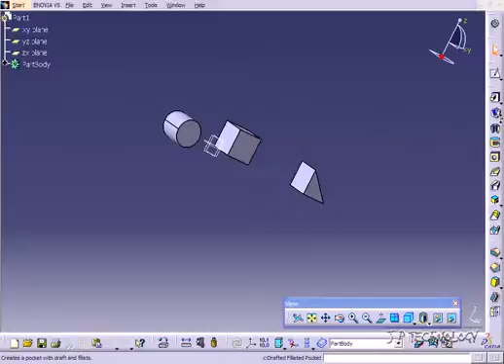This is tutorial number 44, and it covers how to use the multi-pocket feature within CATIA v5. To start off, open up tutorial part number 42, which is located on the DVD. So to find the multi-pocket, it's either on the toolbar here, or you can find it if you go to Insert, Sketch-Based Features, and Multi-Pocket.

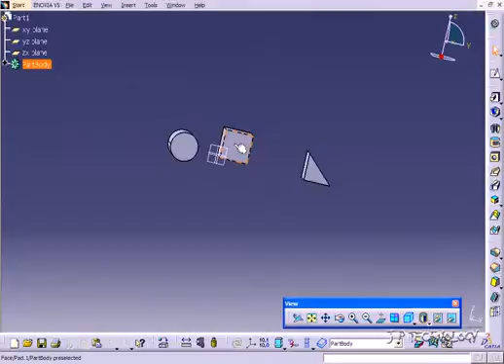So the multi-pocket works just like the multi-pad that we used in the last tutorial. So you're able to create one sketch with multiple closed profiles, and from those closed profiles you're able to use the pocket to cut into an object at different lengths and heights. So to start off, let's click the face of the square right here. Let's click Sketch, and we'll zoom in, and let's draw a bunch of little squares on the face.

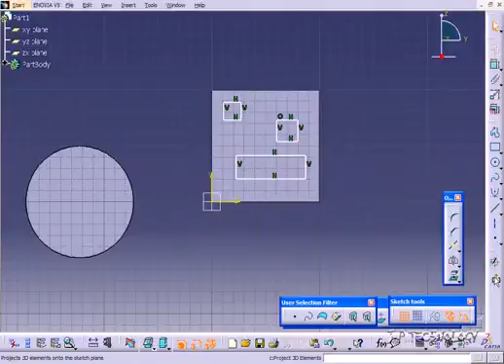Now we've got 3. Now let's check our sketch tools, so our sketch analysis. And just so you know, you've got 3 closed profiles that you're able to either cut or extrude with. So let's close this, and let's go back to our other workbench. And let's use the multi-pocket. And what we're going to do is we're going to cut into this part at different heights. So let's click the first one, and you'll see it highlighted in blue. And let's cut this one all the way through.

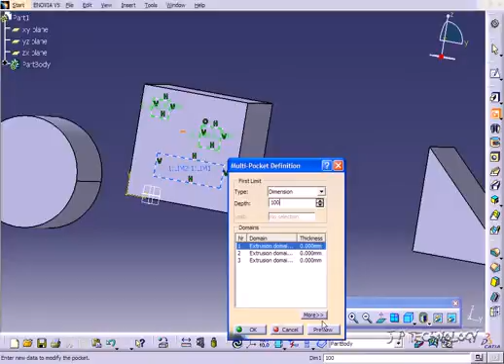So let's type in 100, click preview, and if you rotate it around, you can see that it's gone all the way through. Let's click this one, and let's make it 50. And we'll click this one, and we'll make it 20. Now we'll click OK. And if we look through, you can see that we have 3 different cuts at different lengths from the one original sketch.

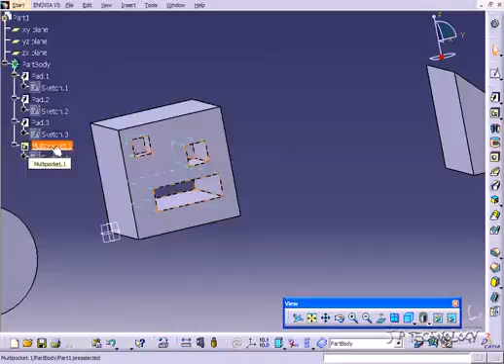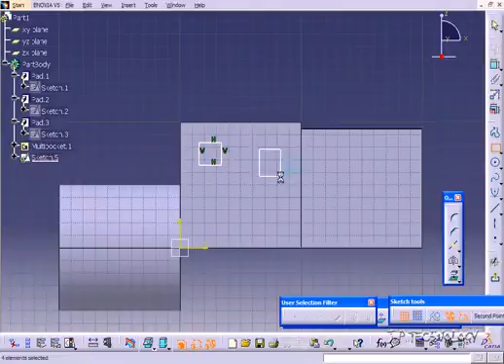Now if we open the part body, we can see that we have the one multi-pocket, and if we double click on it, we're able to change the dimensions. So let's click this 100 one, and let's put it to 50. Click OK, and now it's only at 50, halfway through. Now let's click this face here, and let's click the sketch, and let's draw a bunch of other little squares. And let's go back up. And now, if you can see on the side, they're in plane with this face there.

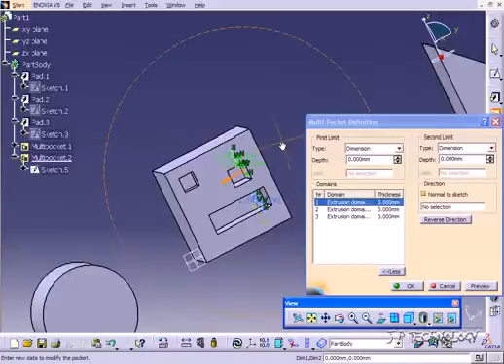Let's click the multi-pocket again. And this time let's click More. So for each one that we choose, we're able to choose how far it cuts either way. So right now we have the one in blue highlighted there. So we'll change this to 50, and we'll put this one to 10. And if we click preview, you can see that this guy is going to go from that plane there, 50 that way, 10 that way.

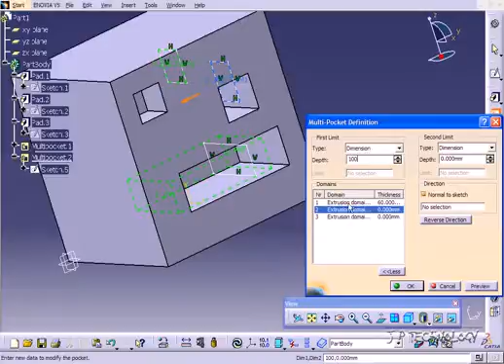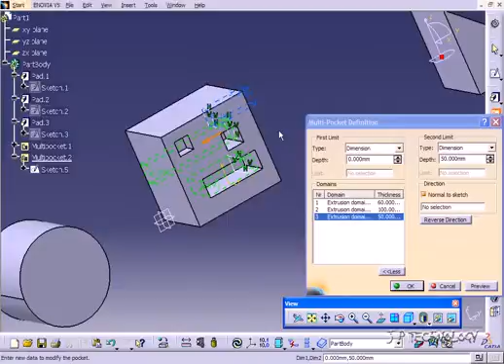Now let's choose the second one, and we'll make it go 100. So it's going to cut all the way through. And the other one, we're going to make it go 50, but it's going to cut in the other direction all the way through. So you can see that from this multi-pocket, we're able to cut both ways, one way or the other way, all at once. So you're able to get a large degree of freedom when you're trying to cut, say, from the middle of an object out. So let's click OK. And you can see how we cut through that way, and this guy's cut down the middle.

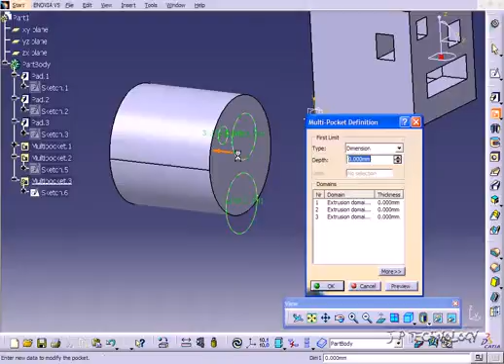So let's click the circle, and let's make 3 circles inside of it. Let's click one circle there, one circle there, and let's make one closer to the edge that's outside. Now let's go out, and let's click the multi-pocket, and let's make some more pockets again. So let's choose number 1, and let's make it 50. Number 2 we'll make 30, and number 1 we'll make 100. Click OK. And what happened to number 1?

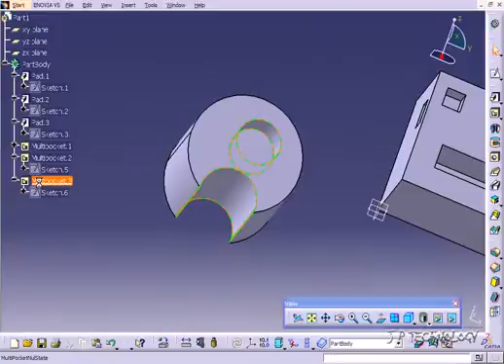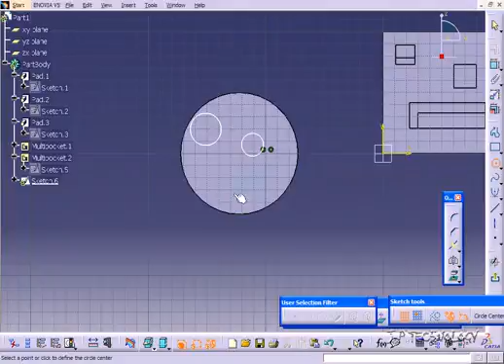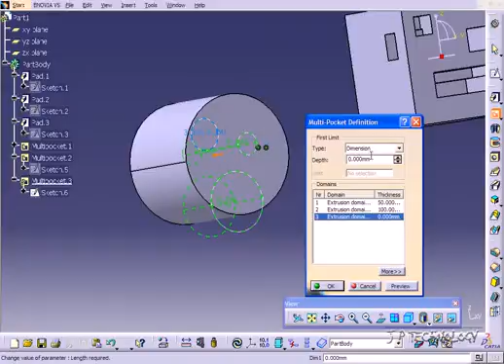And we'll click on the circle, and let's make some circles on the face. So just make 3 circles anywhere on this face. I'm going to pull one that's out a little bit too. And let's go back to the workbench. And let's click the multi-pocket and let's cut all three of these. So for number 1, let's make it 50. For number 2, let's make it 100. And number 3, let's make it 30. Now let's click preview, and you can see where all of these guys are going. Click OK. And again, we've done 3 cuts from the one sketch.

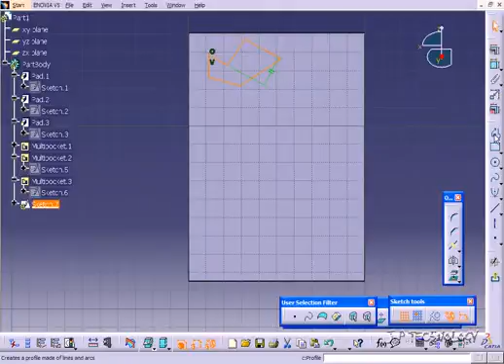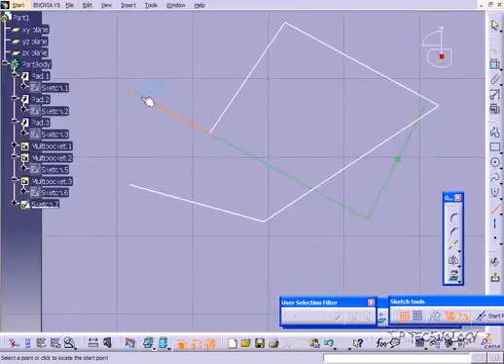Now let's click on this face here, click sketch. Now let's zoom in and let's make 3 unique profiles. And one more profile. Now you can see that this one up here isn't completely closed. Now if we go to our sketch tools and click sketch analysis, it's going to show that we have a problem with it. So let's close this and let's just change this. So let's delete this line here and let's just close it up. So again, it's very important that you use that sketch analysis tool just to make sure that everything's closed. So we'll check one more time, sketch analysis, everything's closed.

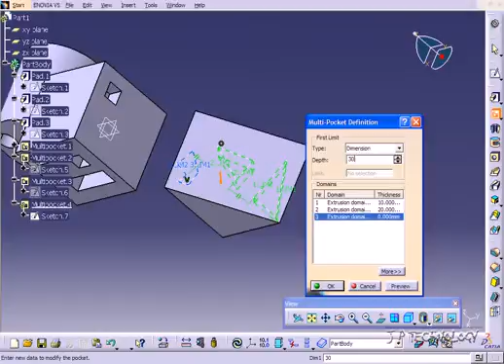Now let's go back up to the toolbar and let's use the multi-pocket again. The first one we'll make 10. Second one we'll make 20. And the third we'll make 30. Click OK. And now we've made our 3 cuts again with the multi-pocket into the part.

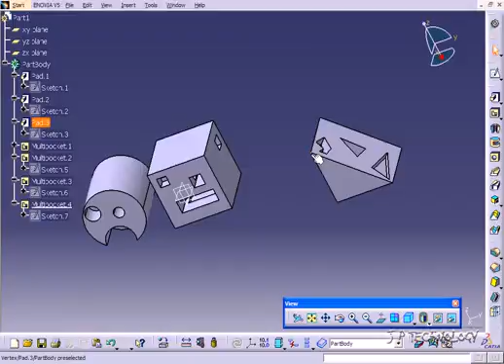So again, just like the multi-pad, the multi-pocket allows you to save some time, as from one sketch, you're able to cut out multiple profiles. So you can go from 2 up to, say, 100 profiles, and you're able to use just one sketch and one feature to extract and cut out all those different profiles. So this tool is potentially a very big time saver. And this concludes our tutorial on how to use the multi-pocket feature within CATIA v5.